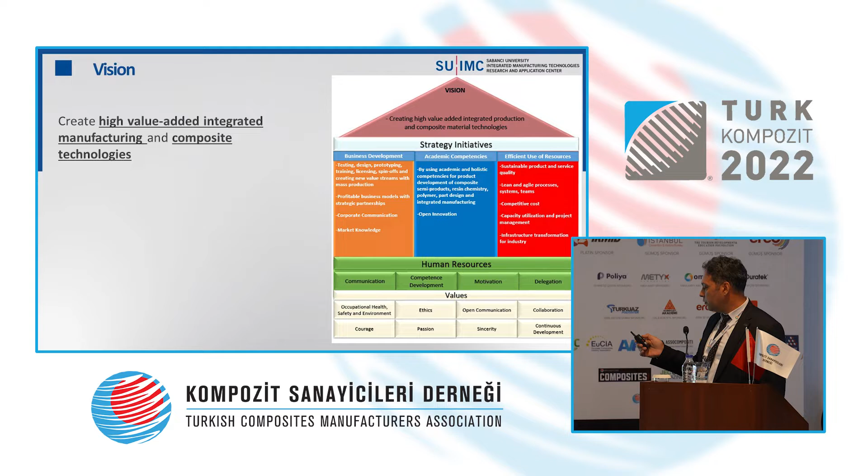It is our vision to produce and manufacture high value-added integrated manufacturing and composite technologies. And according to our mission, some companies think that we are an R&D center for Kordsa, but we are developing and making use of high technology with our industrial partners via our open innovation principle. And during the testing, during the optimization, we are developing the processes together with our engineers. So we are trying to create synergy between the industry and academia.

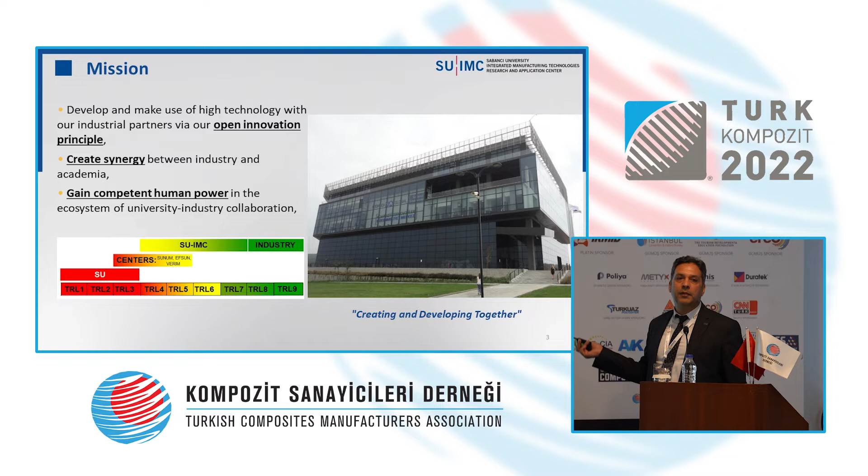And normally the universities are working in TRL 1 or TRL 2, but our mission is to reach up to the prototype level used by industry, and together with the industry we would like to have cost efficient production. They will not just take it and produce it. They will first have process optimization, and the industry can take and make its own investment and be able to use it. There are many investments, but some of the technologies are not cost efficient. That is why they do not use these innovations or investments.

We have these laboratories and facilities in our center, and we also own AS 9100 certificates and ISO standard, and we have the accreditation and quality assurance, and we are one of the top 3 R&D university centers, and we are only in Turkey, and we are also the first one after the one R&D center in UK.

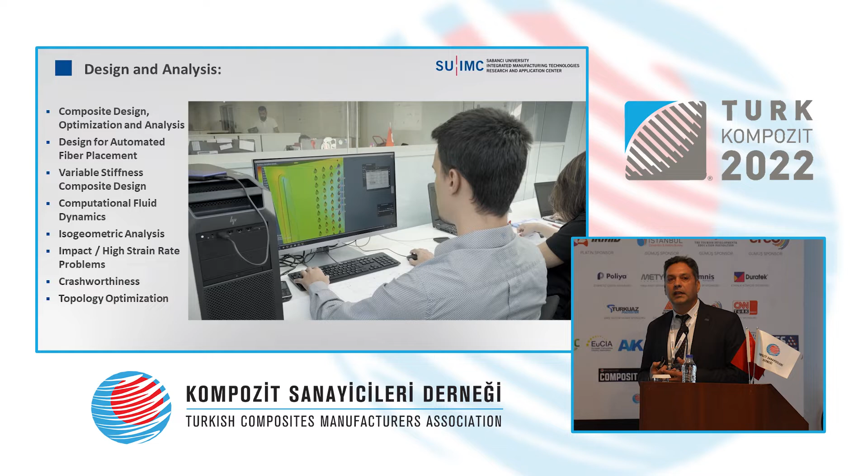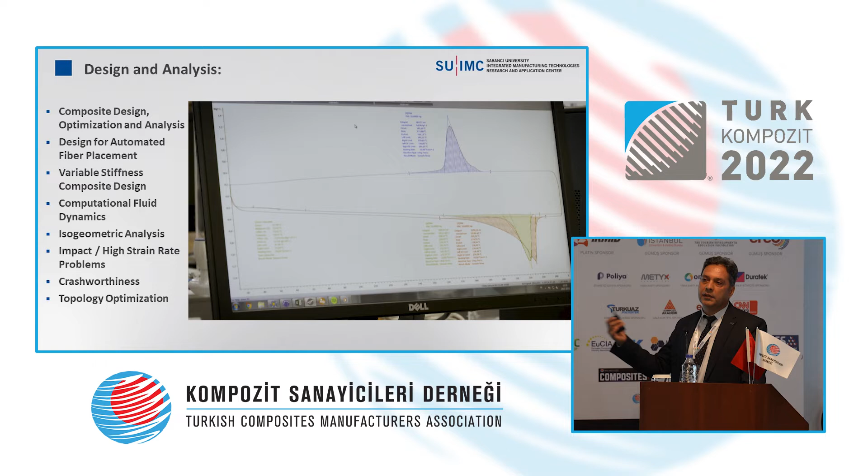We start from the design and analysis of the composite materials, and the companies come and we design composites, and we optimize and analyze them, and we design for automated fiber placement. We have variable stiffness, and not only for fiber orientations, we can direct fiber, and we have this very experienced analysis team for the composite design. And starting from the selection of the materials, we can develop design, and we can have computational fluid dynamics, and we have the topology optimization.

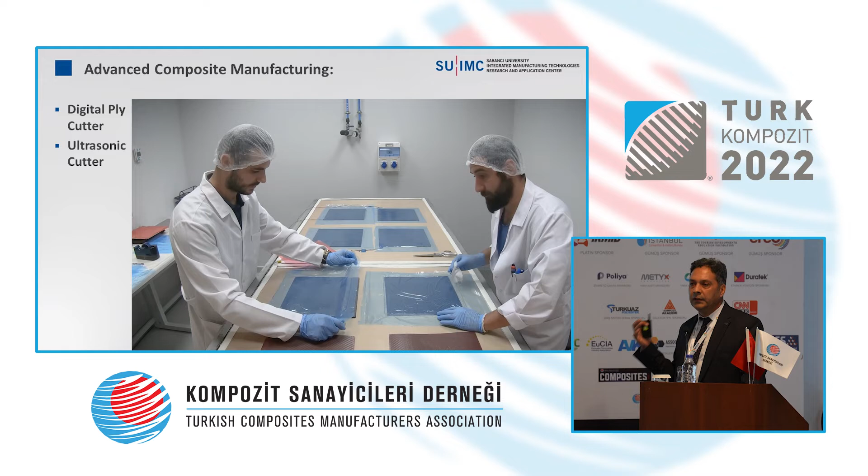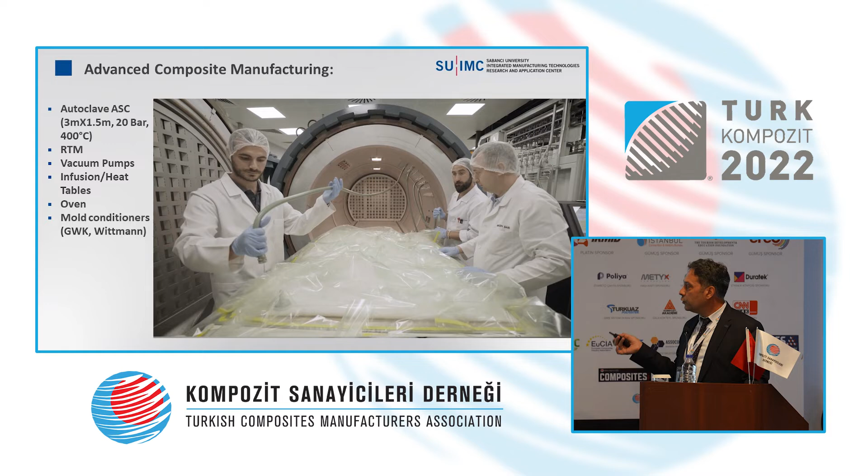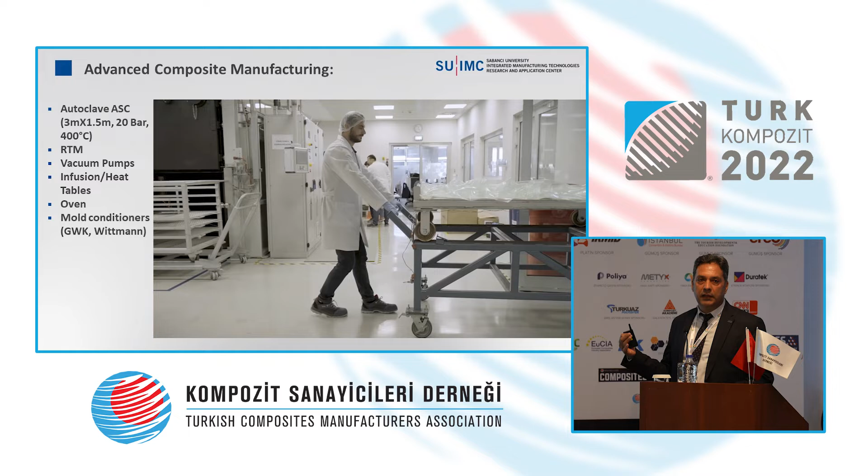And for the advanced composite manufacturing, we have autoclave, infusion, oven manufacturing, and mold conditioners. We can apply all of these options in our facility. We have a 3-meter autoclave, and for the aviation sector and for the aircraft sector, we can develop parts and pieces. We are not establishing these projects for R&D purposes, but we are working with different companies directly, and we have our projects with these companies.

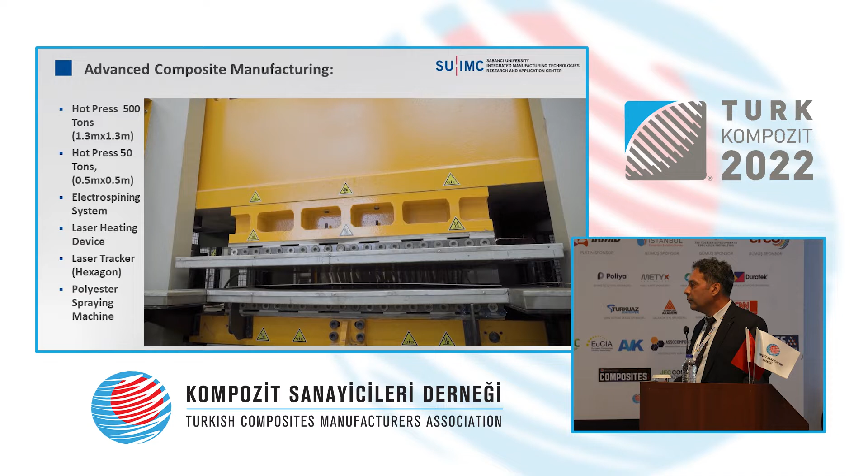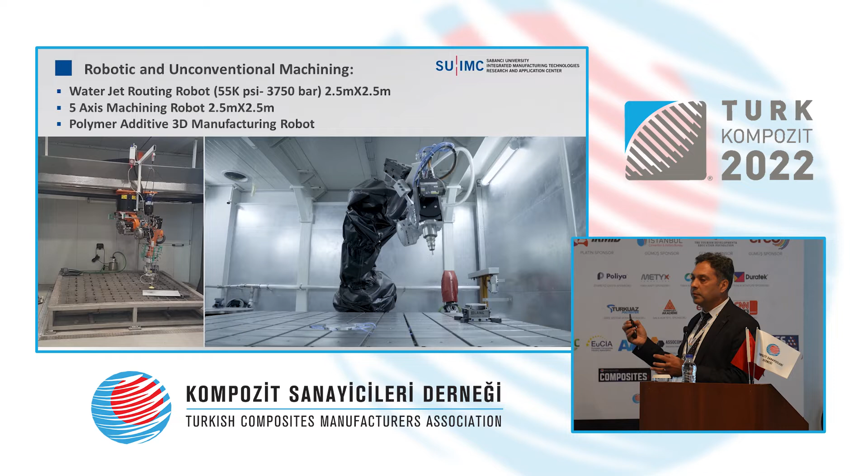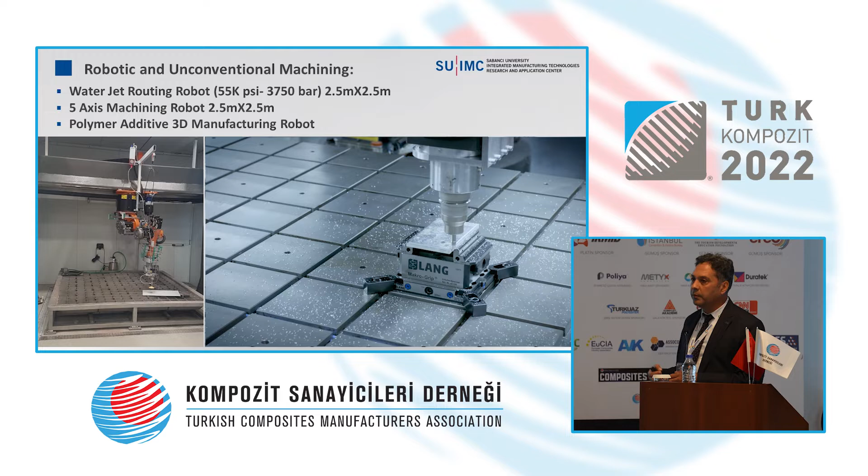We have hot press as well. This is one of the production options, and we have different production options. We have hot press, and we also have heating processes, and we have 3D printers, and we have polymer printers. We have thermoplastics, we have thermosets, and we have robotic and unconventional machining, and a 5-axis machining robot is working together with the water jet routing robot. And we also have a polymer additive 3D manufacturing robot, and our robots can work in a synchronized fashion.

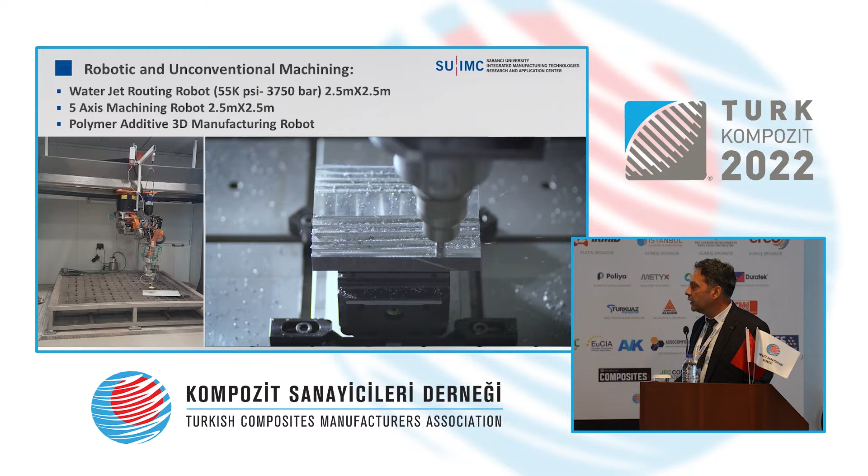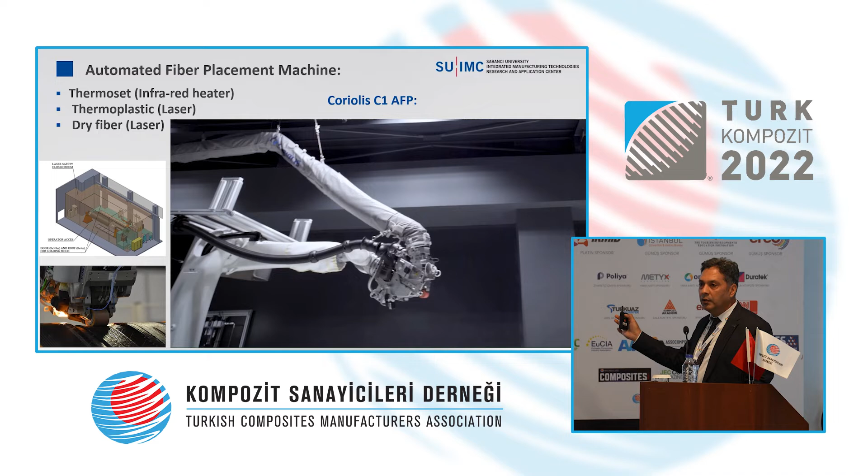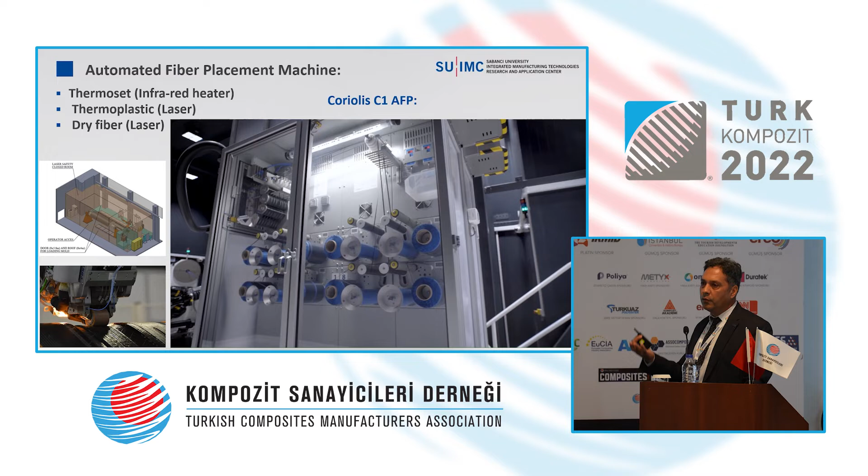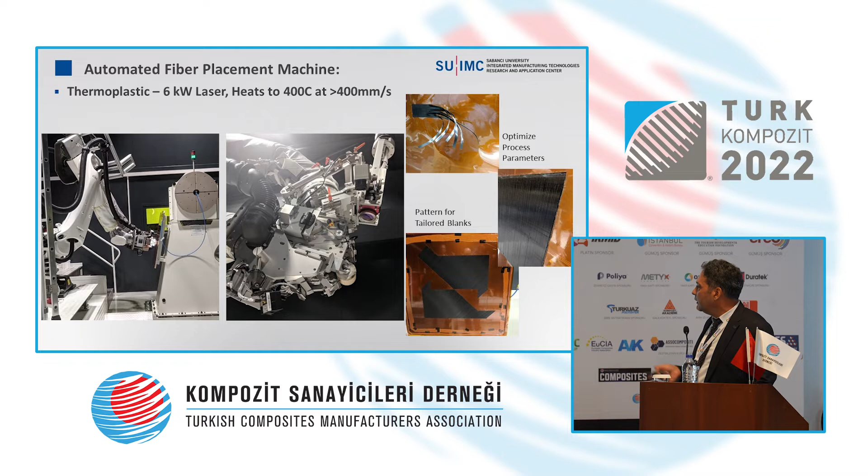And we have all of the materials for the use of TUSAŞ. So this is a very good example for the cooperation with the industry. And there are different scopes for work. I'll skip this part.

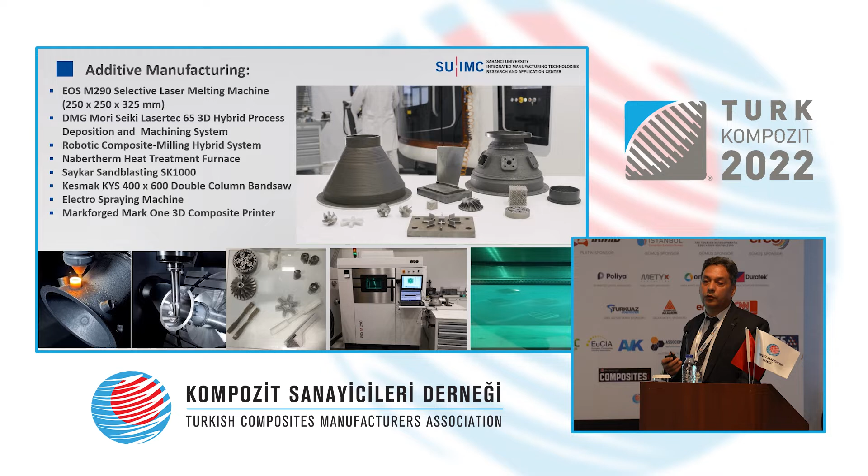And we are actually collaborating with the engine companies. We cannot actually publish the work and the projects that we do together with the companies due to the privacy, but you can see them, 3 different companies, and we have polymer processing, and we have twin screw extruder and pelletizer, and we have high shear stress compound preparation.

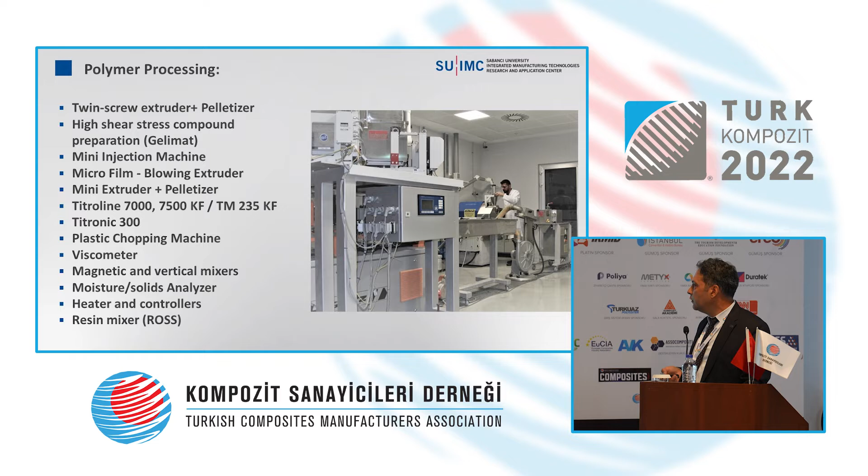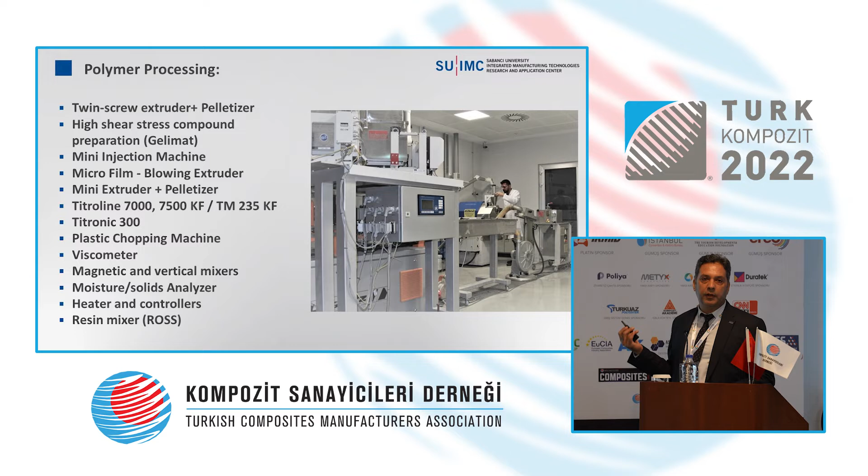We also have mini extruder, and we have blowing extruder, and these are antibacterial. There are different types of materials, and we can use and apply them in our laboratory.

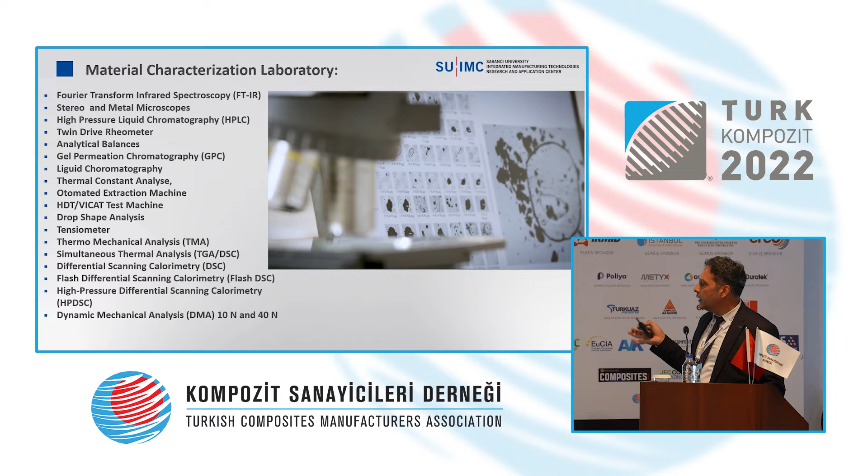And we do also have material characterization laboratory, and this is, I think, the most developed material characterization laboratory, not only in Turkey but also in Europe. We can have Fourier transform infrared spectroscopy. If you have the chemical background, then you will know that there are different laboratories, but these are all under the same roof, that you can test their

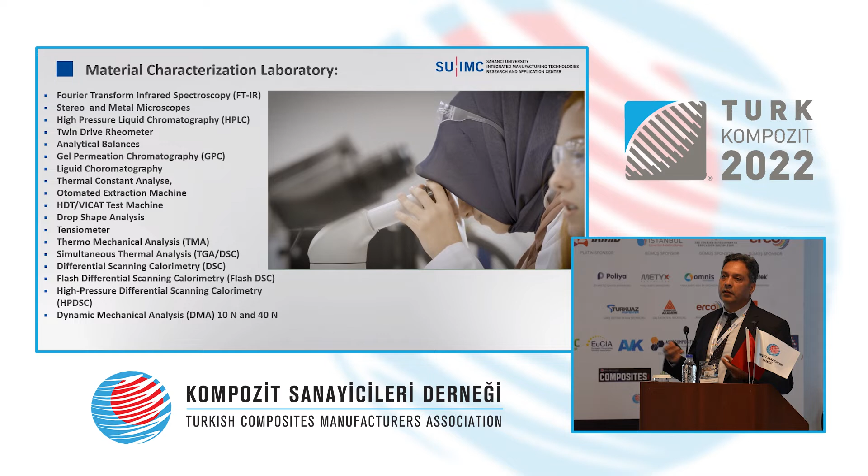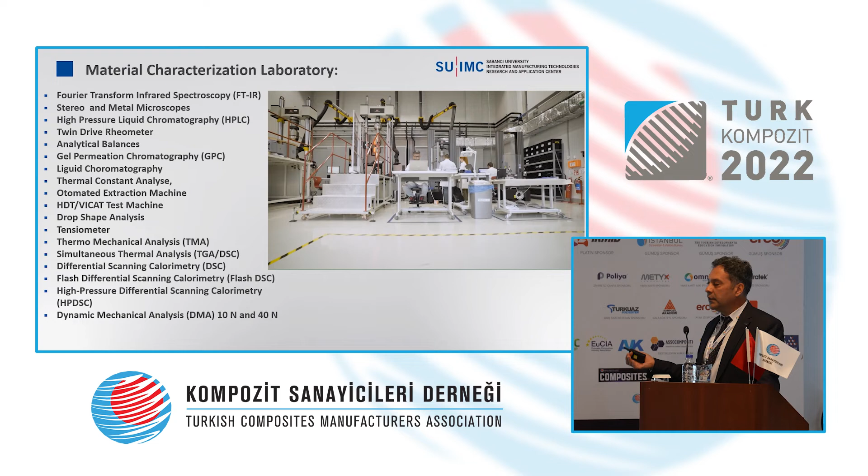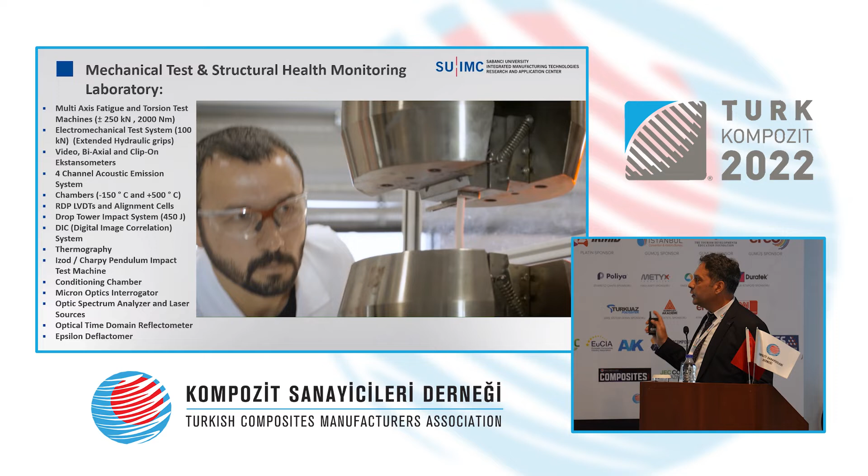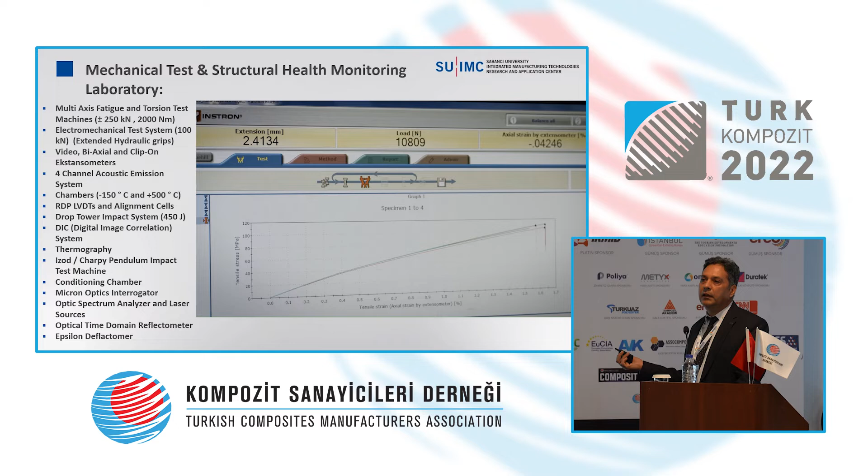Now also we have mechanical tests, structural health monitoring laboratory. We have tension tests, and we have multi-axis fatigue and torsion tests. Fatigue and torsion tests can be applied simultaneously in this system, and this system has certification.

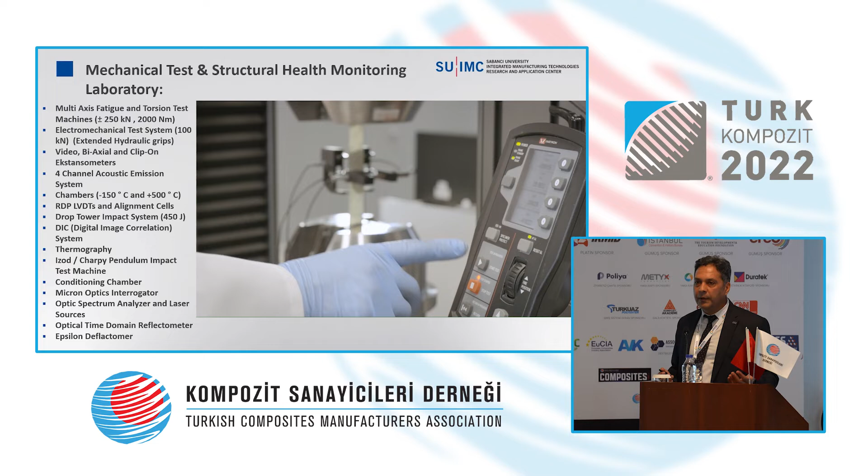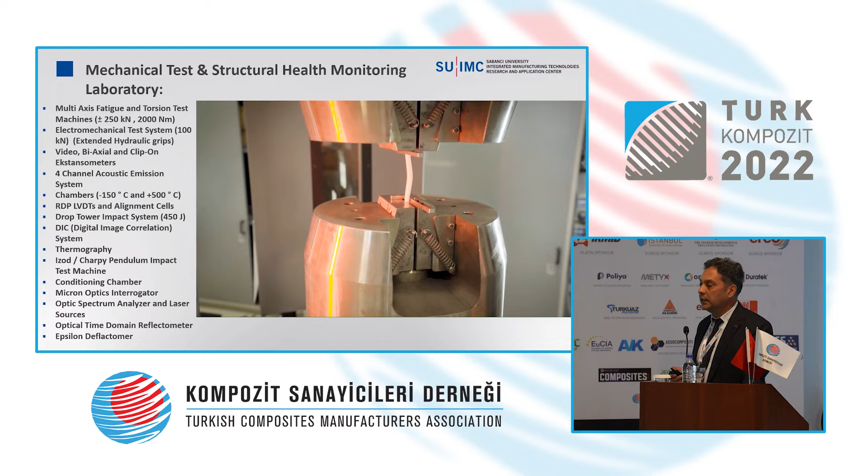We have our qualified personnel, and the students can do their own tests, but when we work together with the companies, all of these machines are used by the qualified personnel, and it is not easy to choose the personnel. You can buy the device, but it is really hard to train the personnel. But now we have this capacity. By the way, we were established in 2016. We are 6 years old now, but we have accomplished many projects so far.

We have our mechanical test and structural health monitoring laboratory. We have 4-channel acoustic emission system based on PCI 2 board, and we have our Photonic and Thorlabs laser sources, and we have thermography, we have acoustic imaging, and we can detect with these cameras where is the fracture, where is the crack. We can detect it, and we can even say the lifespan.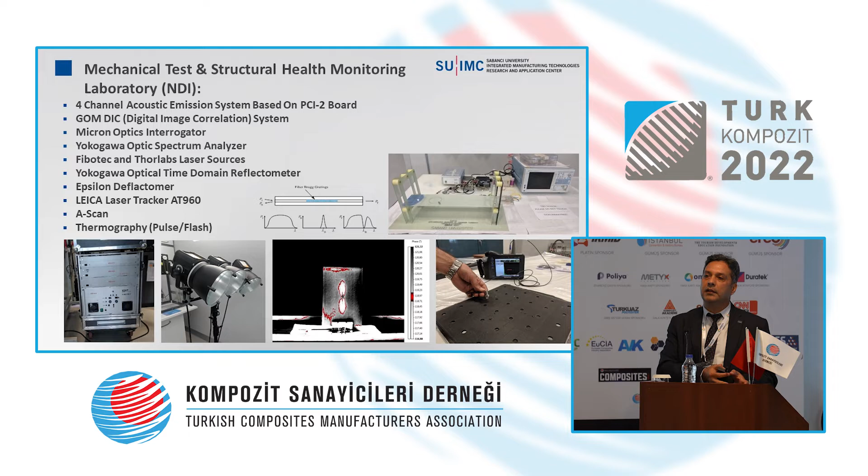We have this infrastructure, and over 95% we are able to provide all the mechanical tests. I should say that the mechanical test laboratory and material characterization laboratory are complementary to one another. And again, in wet chemistry laboratory, we have most of the chemistry tests, and we have developed our own system.

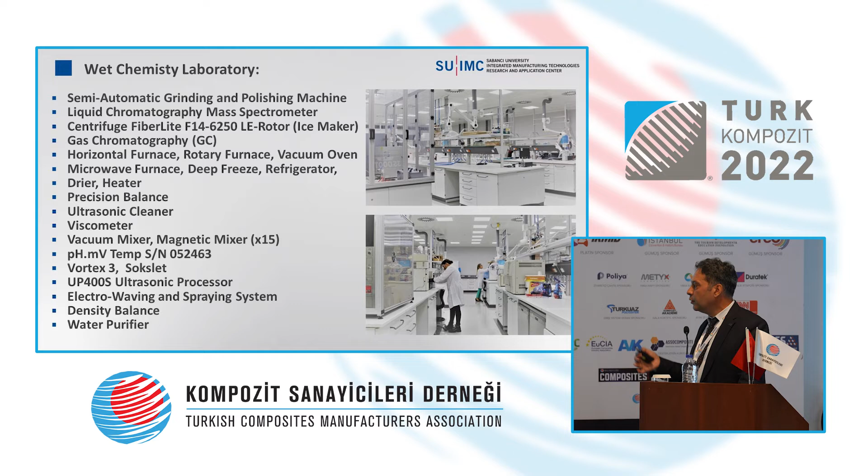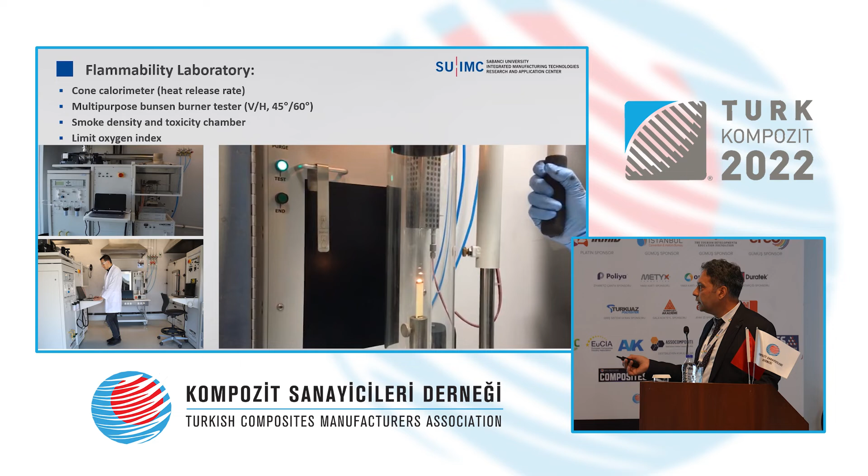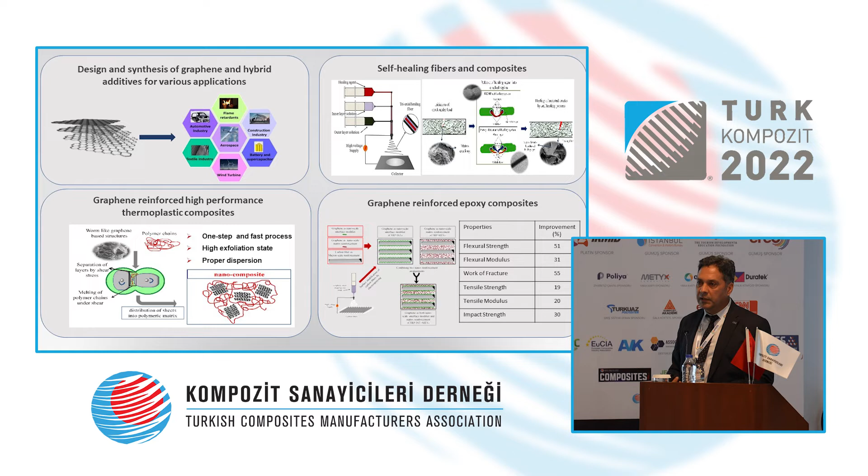We have nano and micro materials, and I already mentioned the polymers, and we have the thermomechanical stress and fracture analysis, and we are working on functional polymers, as I just said, while we have health monitoring of composite structures with IFEM. And we have the design and synthesis of graphene and hybrid additives for various applications, and we have a company for this. Well, this panel was a sustainability panel, and we can produce our graphene from waste material.

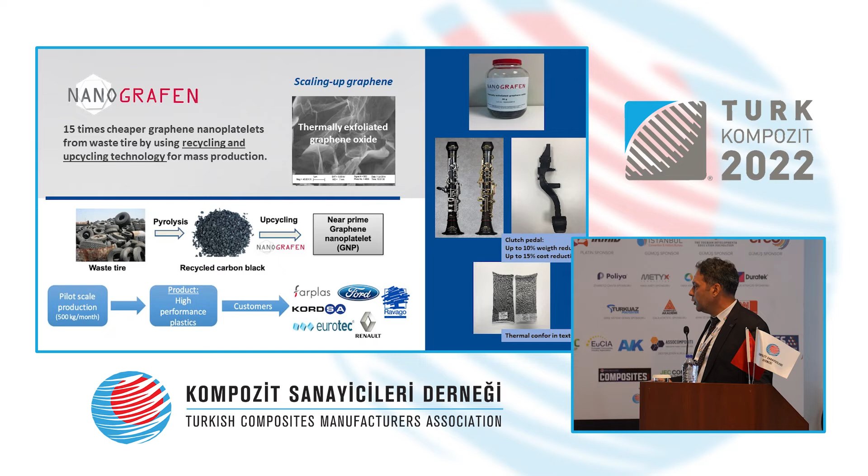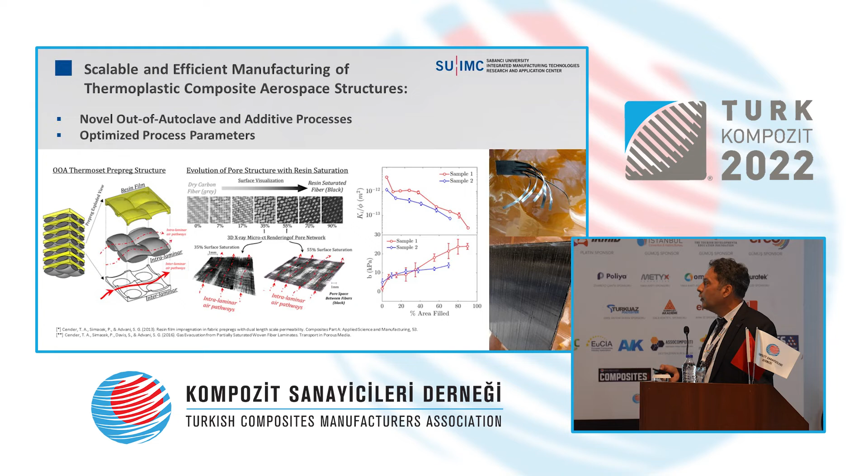Graphene for Renault automotives: graphene-added products are available, and they are stronger than the others. And we have some other works together with Ford. And again, about the thermoplastic materials, you know, they're very much used in the aerospace industry. We had so many works ongoing there, and again we have other occasional projects.

And with this fiber, if you have a certain orientation for the fibers, then you have an accurate amount of strength and resistance, and that is what my PhD was about. There we worked on how we could make the body of the plane lighter, that was the focus, and we managed to do it by 50%.

So what we have done is we have oriented the fiber, because the load that the structure is exposed to is different at every point. Therefore, the automated fiber placement machine has done it for us. So we did the optimization for this, and we have academic work ongoing in this regard.

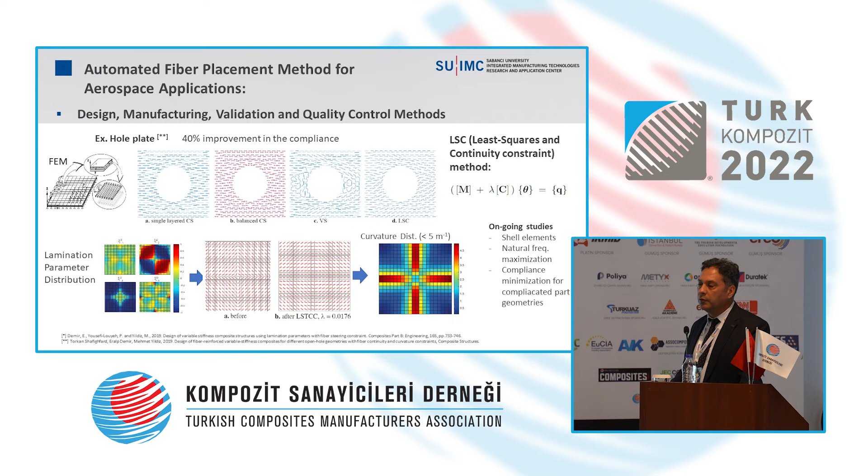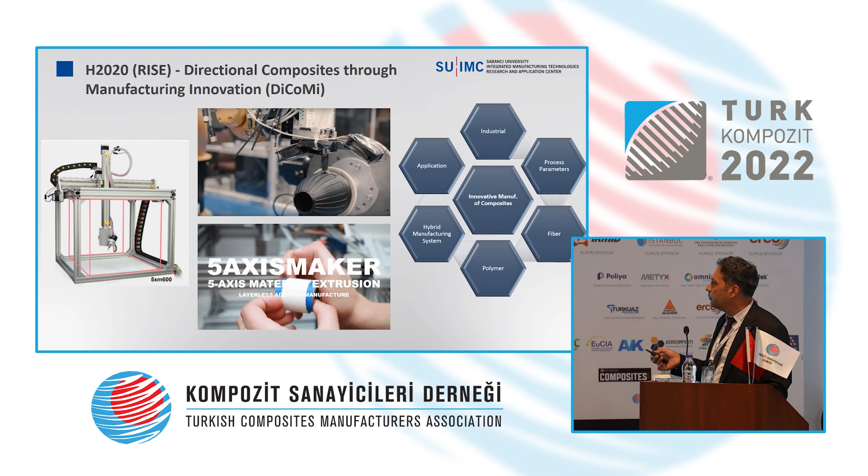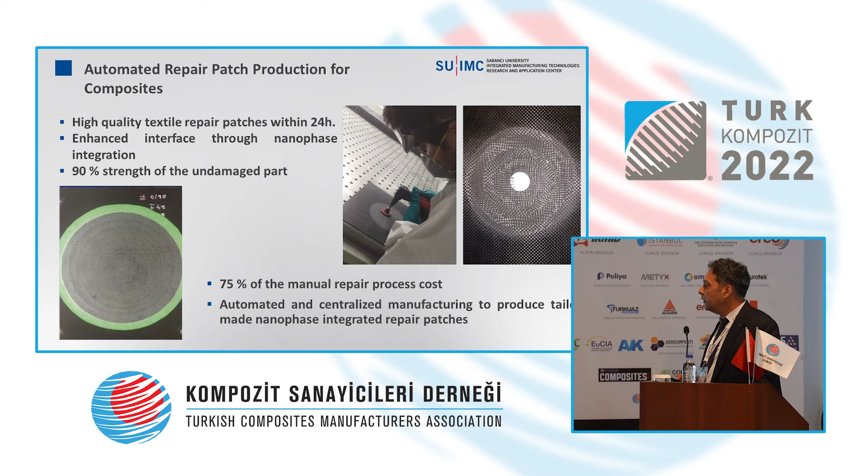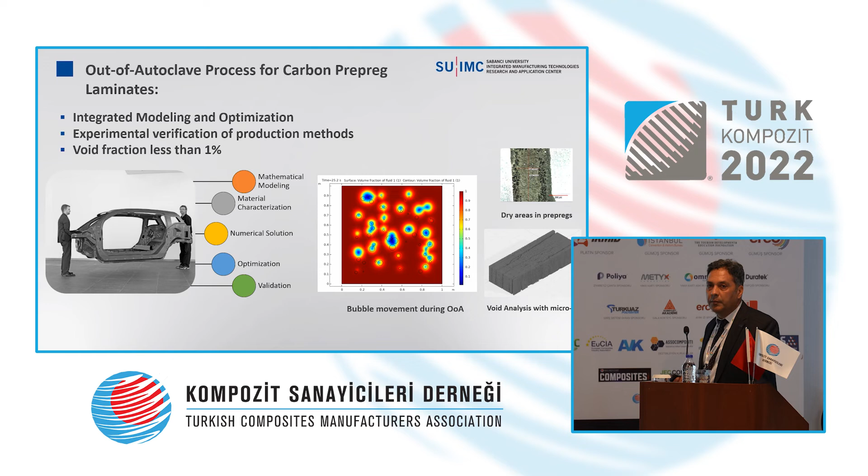Now again, with respect to the processing of the composite materials and the robotic works about the repair of the composite materials, that is another one. And again, about the plasma activation. And the optimization, as mentioned. This is a very much preferred method with a very strong resistance. These parts have all been produced. And again, you see this adhesion. It's not a big problem now to stick them to each other.

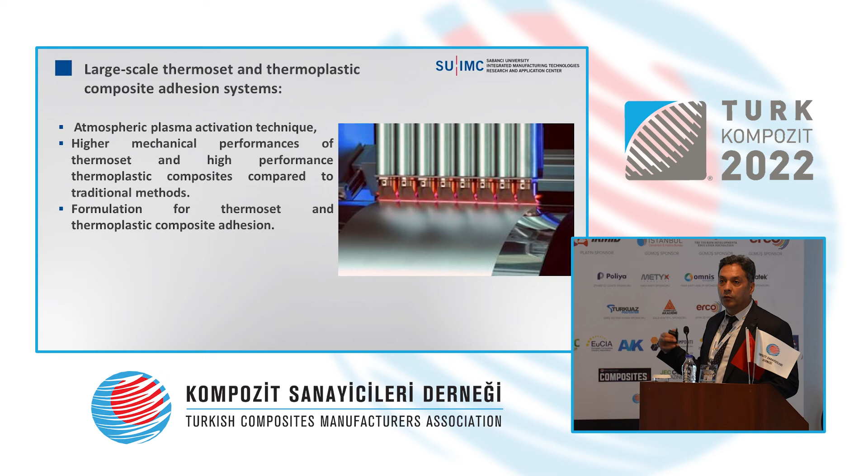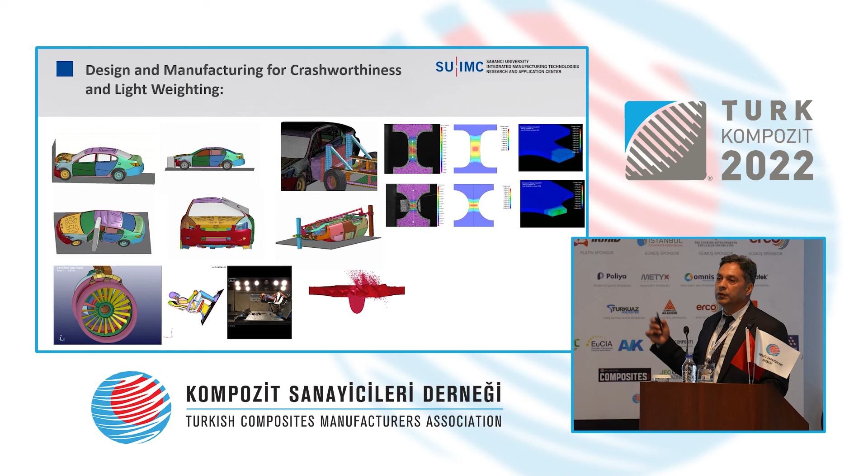But as I say, thermoset or composite material being integrated with metal is a major issue that we're working on at the moment. And three-dimensional composite material work is an ongoing one. And the crash strength. Composite leaf: how they've been manufactured and how they are tested together with Corsa.

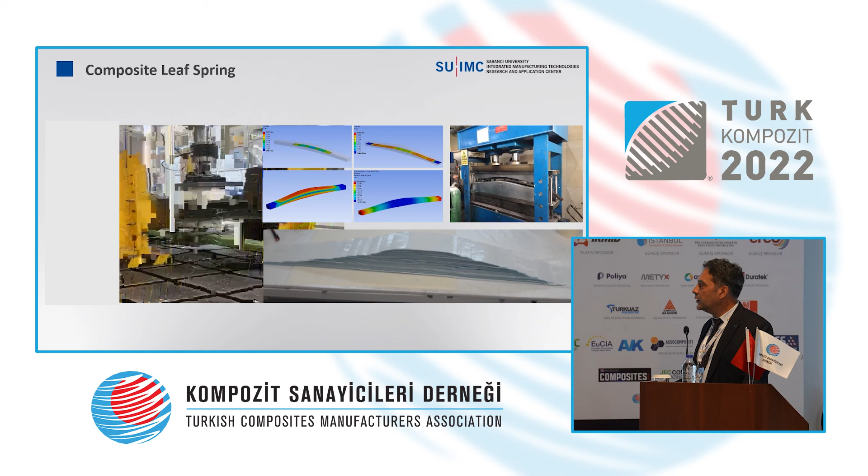And we worked with these on their side: the process optimization, how they're going to be produced and how they're going to be oriented, and their design analysis and the tests afterwards have all been done together with our commercial company, and they're all ready for commercialization at the moment. And again, as I said, we have so many parts production on one side.

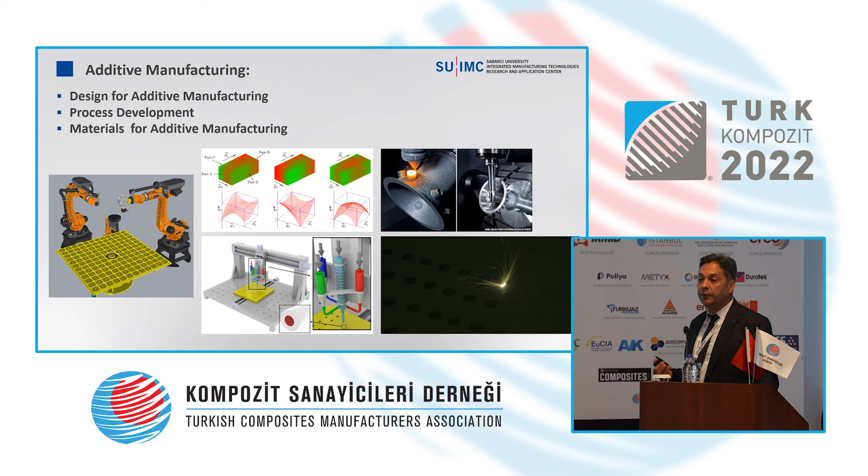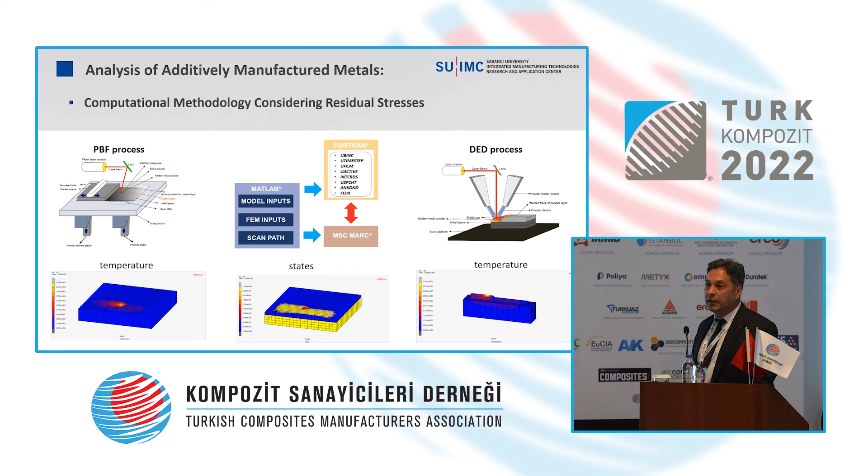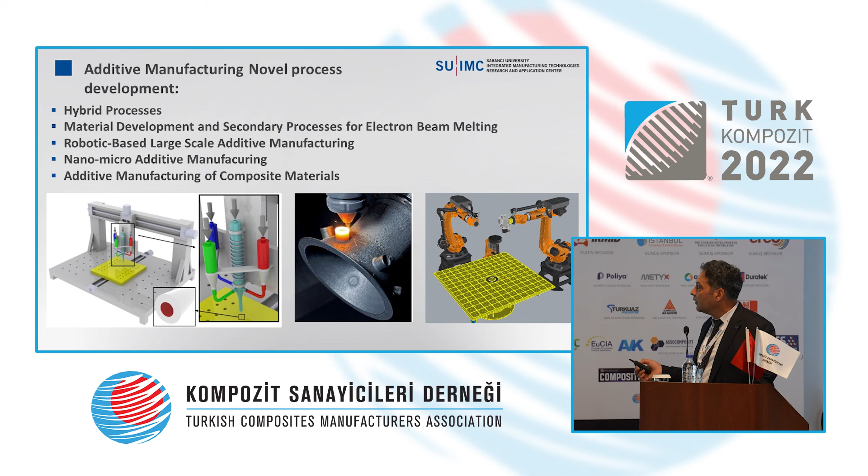So there are so many different types of production materials, and you are able to achieve some reinforced materials in this regard. Well, again, we have this residual stress related to thermal stress. Topology optimization is another area of interest for us. The hybrid processes and the material development.

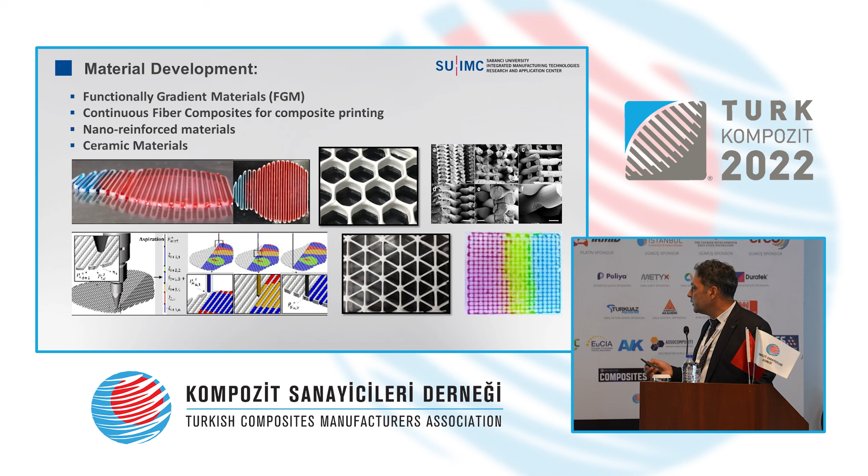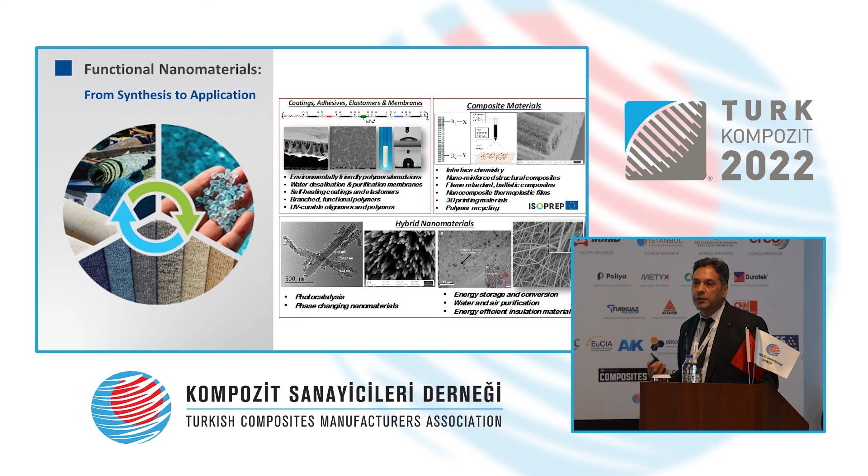And our presentation has been done with the Nanotechnology Center. The material works by the professors. Characterization and functional nano materials, synthesis, and the reactors, starting from monomer. And again, synthesizing is another important area where we can have different types of membranes. So many topics have all been studied in our center.

And again, we would like to increase university and industry cooperation. Therefore, we would like to kindly invite all the industrial organizations to come to us. Corsa is a client of ours. It is not a center of Corsa. It belongs to Sabancı University, open to the whole university. It's a research application center, including all other universities.

We invite everybody to come to us to focus on technology development, and we're there to support you in every kind of research project. And we're very open to this, and I'd like to highlight this.